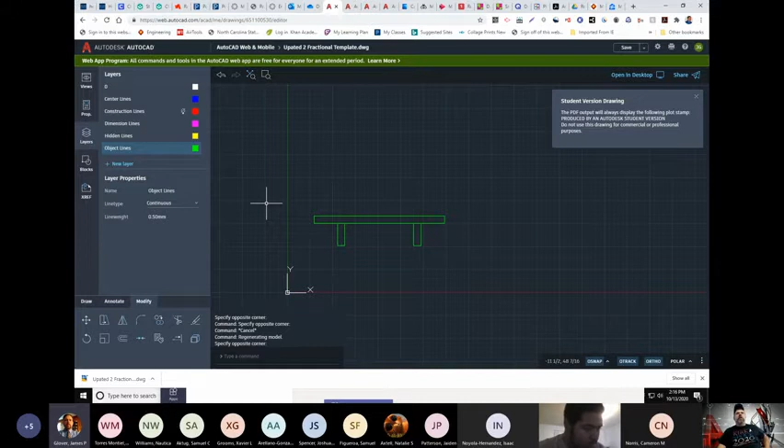I've already got my AutoCAD web app screen up because I was helping somebody at the beginning of class. But what we're going to start off with today is we're going to go to page 125, which is the day's work. Multi-view drawing 6 is this right here. So students should draw multi-view drawings of the following worksheets. These basically are the same page, just divided into 3 sections to make it easier for you guys to see it. So I opened up section page 125, section B, which is here.

Now, one of the things I'm going to do for you guys is show you that this is a slanted area, this is flat, and this is slanted. Because in your illustration, this is at a 45-degree bevel. This is at a 45-degree bevel.

All right, so my figure 5-83, we're talking about 1 3/4 inches tall, rectangular side, comes over here, comes down at an angle of 45 degrees. It tells you that right there. It's 45 degrees on this side. It's 45 degrees from this corner. You end up with a triangular shape with each angle almost being 45 degrees.

All right, so we start with our bottom line on a construction layer. We go up 1 3/4 inches to the top. And then in the center here, almost in the exact center of this, we got to go up 1/2 inch, 3/4 inch. So how far is it from here to the top? Somebody tell me how far it is. It's 1/2 inch from here to here, 3/4 inch to here. How far is it from here to the top?

Simple mathematics, adding and subtracting fractions. Anybody? Anybody that can unmute yourself and tell me what the distance is from the top here to where this begins? You got a 1/2 inch to 3/4 from here to here. So what is left here? 1/2. Who is this?

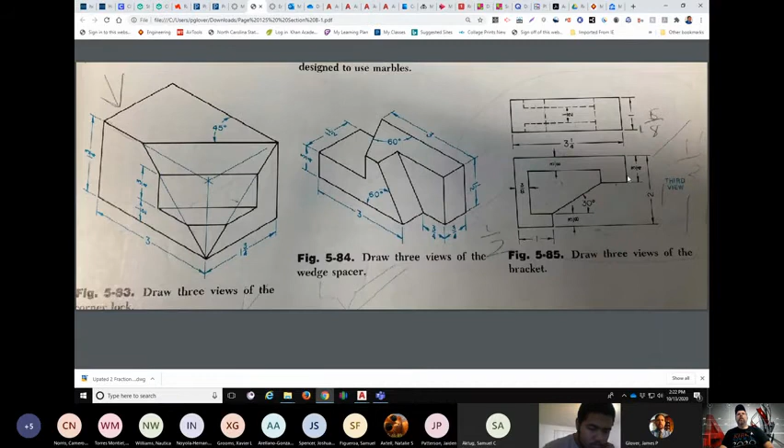All right, so you see my construction lines. All I did is I started on my construction line layer. We'll zoom in a little bit.

I then offset this line here up 3/4 of an inch because that's where that flat edge goes. Then I offset it from here to here by 1/2 inch. And then I offset it again by 1/2 inch to get my top line.

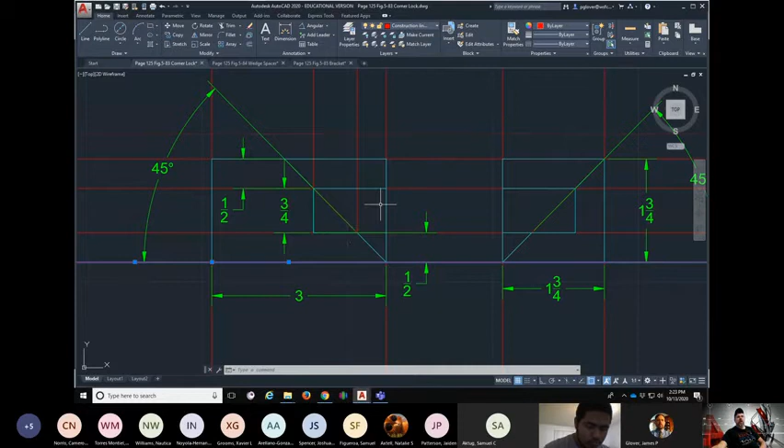It's that simple, and you create a vertical line here with your construction lines. Then you basically just have to draw your top before you can figure out where this section comes in here. So you have to do your top before you know where this point comes in right here.

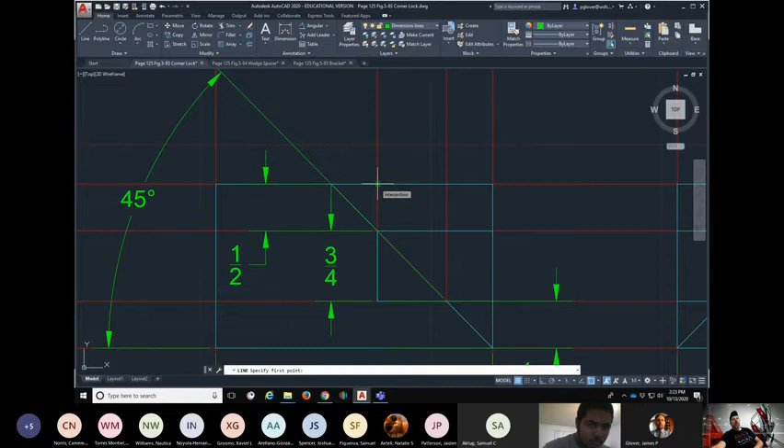This point right here is what you're talking about. It lines up right with this one right here. I can prove that to you by construction line. Right there, so those lines measure up, they line up, but you have to draw one view before you get the other views done. So you need all 3 views working together to give you everything.

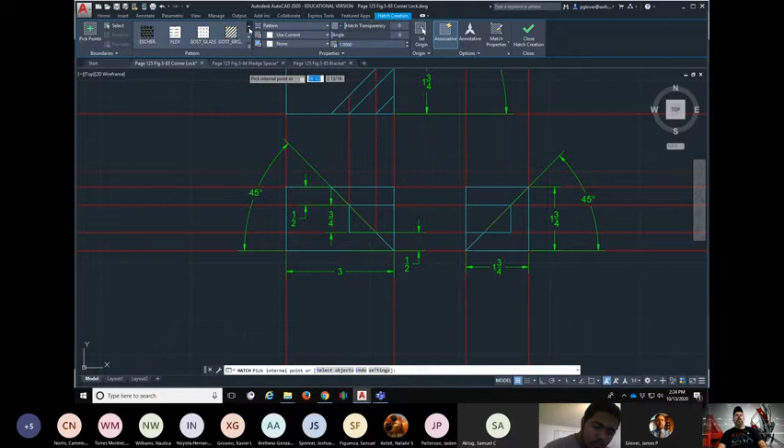And so your angle here sort of throws off your view. But what I want you to do is create a way of separating

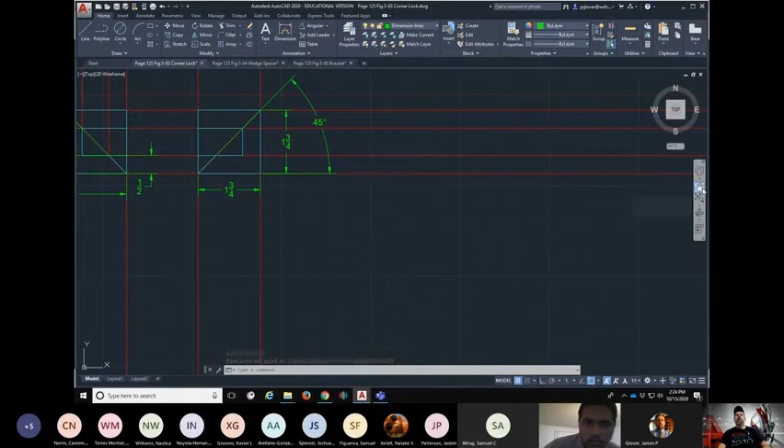the angle views from your flat views. So what we may have to do, we may have to go in, excuse me. Now, that's the pan tool in AutoCAD that you don't have in AutoCAD Web App. But you can do this even in AutoCAD Web App.

So if you type in join, and you go up here and you join this line, and this line, and this line, and hit enter, you're going to create a geometric shape.

And in that geometric shape, you're able to take that hatch pattern to differentiate that that's actually a slanted groove or slanted slide, something a little different, just to break up the lines.

All right, so I don't necessarily like that. But for you, you can go through here and choose which one you want. I'd be more likely to choose the gradient.

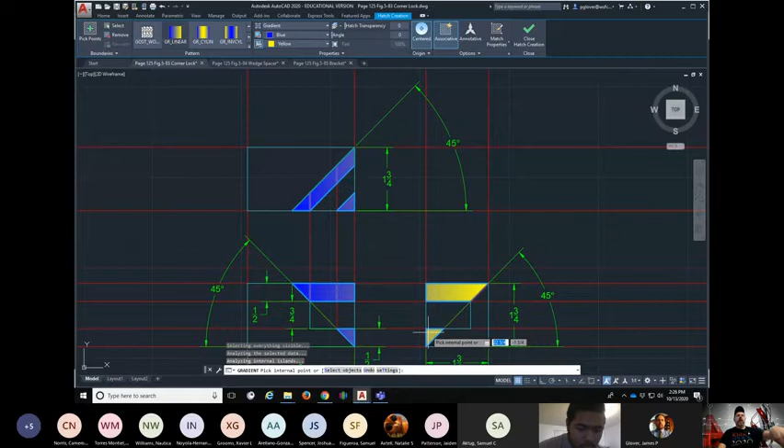And you're going to choose the areas that are going to be slanted and make them a different shade to show off that those are actual slanted areas. It does add a different view to your drawing when you're able to see those in solid shapes.

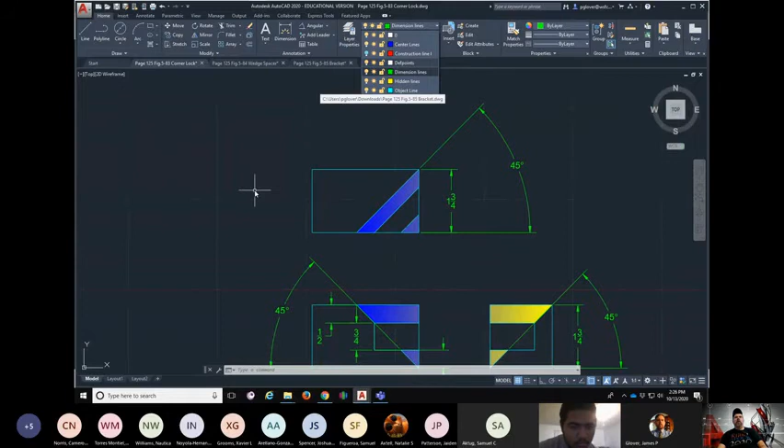That's figure 5-83. Now I'm going to go backwards because I don't need that personally. I can tell that they're slanted just by the views themselves, and so I don't really need to see that.

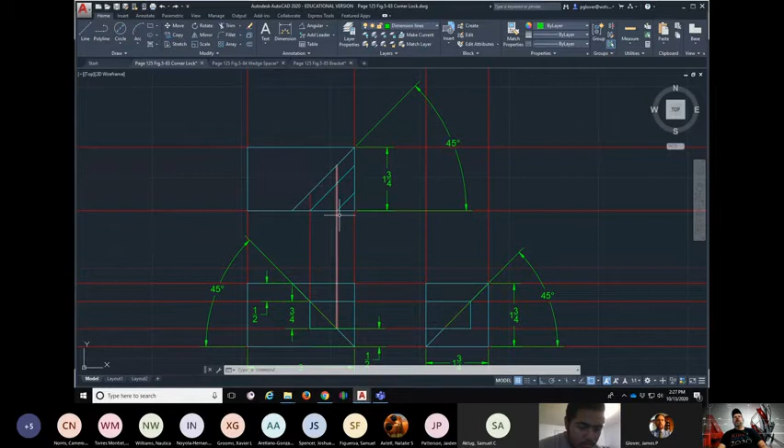But for you, I want you to set it as a shade or a gradient or as a hatch, so you can be able to prove that these are actually slanted and not just all flat. I want you to be able to prove it to yourself and to me. All right, so that's figure 5-83, 5-84.

Let's go here. One that's a little simpler. Let's go to our construction line layer.

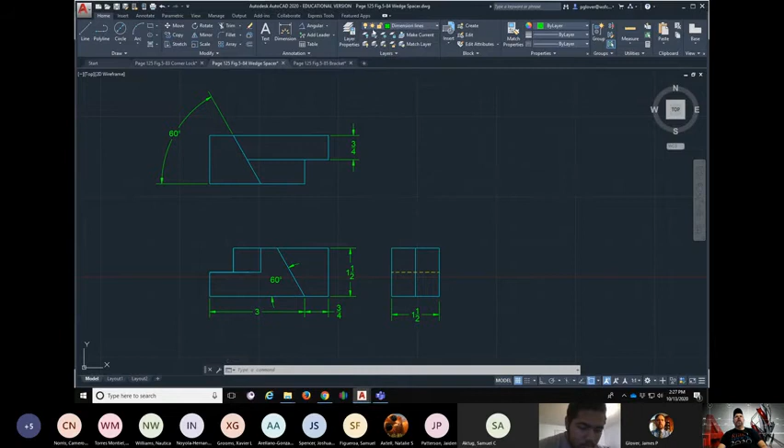Now, I can take you back to the drawing, but I can also show you here because I got everything dimensioned. All right, so I know this whole width of this side here is 1 1/2 inch. I know the whole width from here to this point is 3 inches.

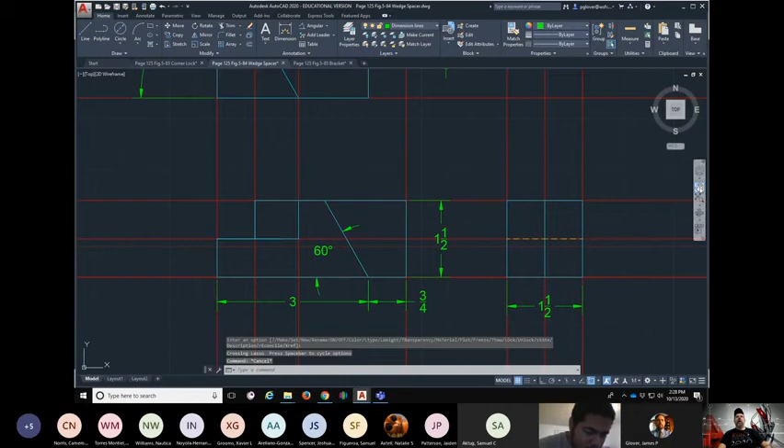And I know on the back side of this line is 3 inches from here to here, from this corner to this corner.

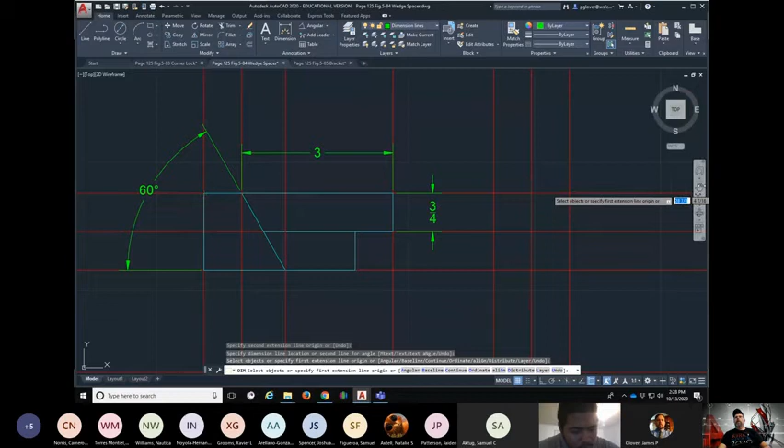All right, I know this angle here is 60 degrees. I know this height here is 3/4 inch. I know this angle is 60 degrees. Now, this is the slanted edge.

This is a straight up and down vertical edge, and part of this is a slanted edge. So what we would do, if you wanted to show that...

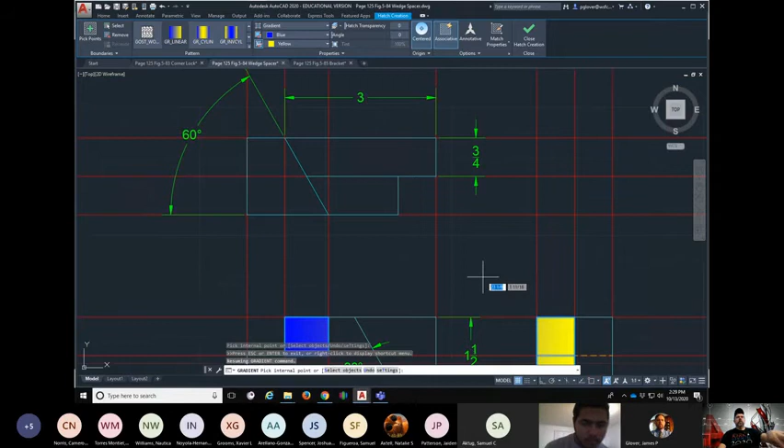And there you have your slanted edges shown by gradients.

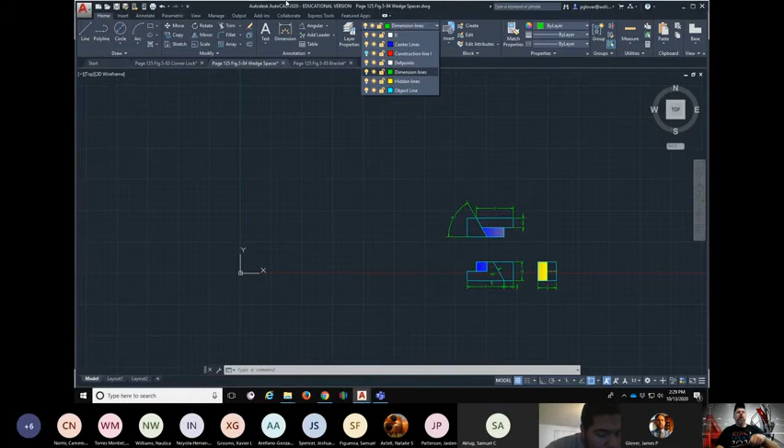Now, but those are angled edges there. That's an angled edge there, that's an angled edge there, that's angled, this is angled. So that's how you're determining your angled edges, is by showing your gradients in those edges.

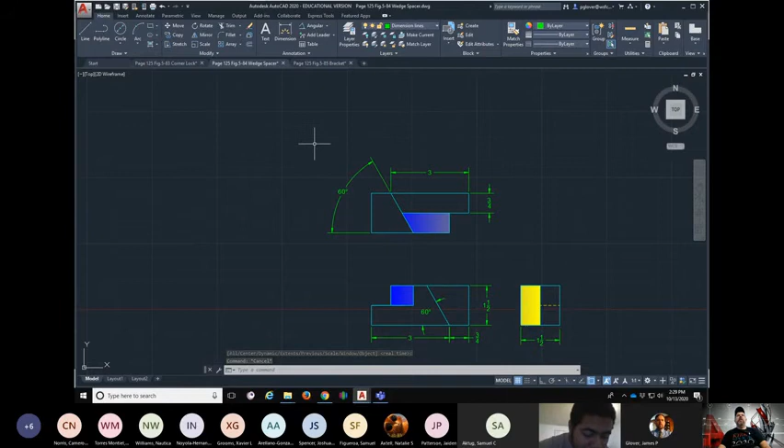I don't need to see that personally, but I want you to be able to show me and to verify that they're actually angles by doing that.

What you would do is, in order to create that as a shape, as a geometric shape, and not just lines, you have to go in and click Join, join, enter, and select your line types.

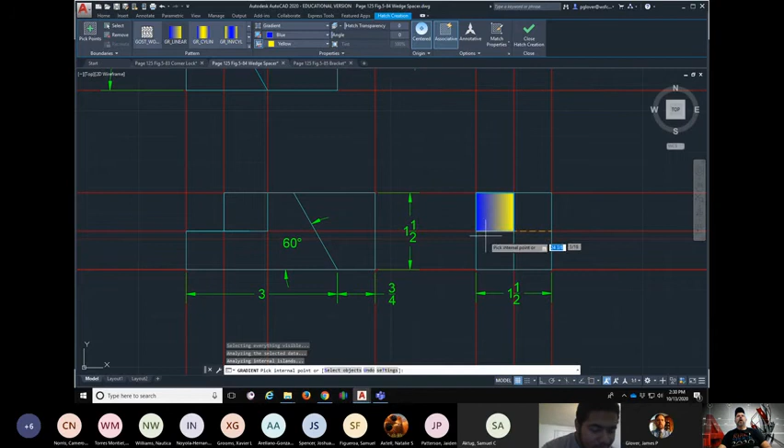And hit enter, then you would go to gradient and enter. So you get a gradient on this edge showing that this is actually a slanted edge, not a perfectly vertical shape.

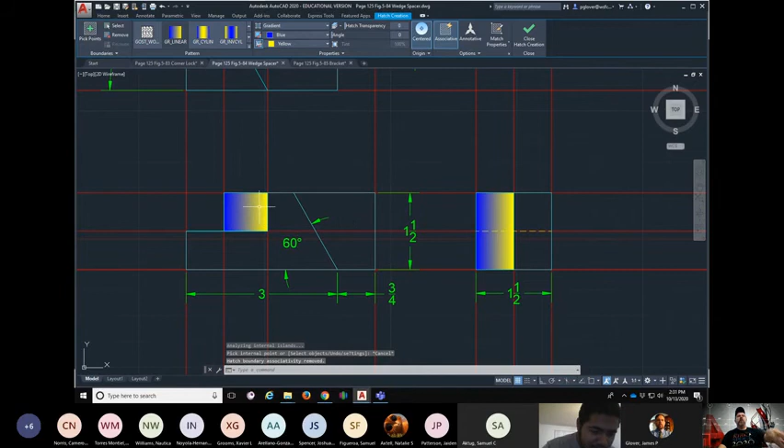And then you would do the same thing here. But see, this shape is an actual geometric edge because when I formed my lines, they met exactly at each point, so it joined them together for me because I used my snaps.

If you're not able to get your gradients here, it's because you're not exactly touching every point you need to touch. So you may have to go in and join those together to make it actually touch.

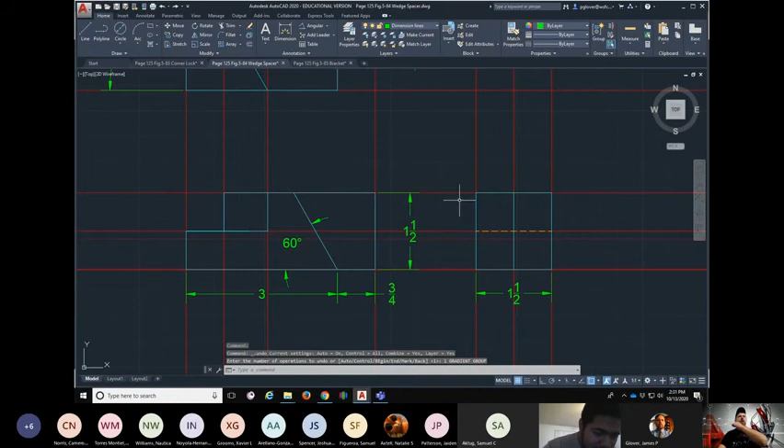All right, so we'll go back to the drawing now, the actual sheet. So I know that's 1.5 full. It's 3/4 of an inch. It's 3 this way, 3 this way, 60 degrees and 60 degrees. The same information I showed you on my drawing.

All right, now let's go to this one. This one is a solid rib inside of another member here. So we said 3/8, it's 3/8 this way. I know it's 3/8 this way. This way is 3/4 of an inch.

It doesn't tell you that until you actually draw out your shape and figure out your angle of 30 degrees. It doesn't tell you that until you get your 30-degree angle drawn from here going up.

All right, now this rib we will show by hidden lines. We're using our layers. Turn off our construction lines.

Now, can anybody tell me why, when my construction line snapped up here, why I wouldn't go back in and delete it? Can anybody tell me that? Why I won't delete that? Can anybody tell me? It wasn't because I was being lazy and didn't want to. Why was it that I didn't delete that construction line? Anybody have an idea? Anybody?

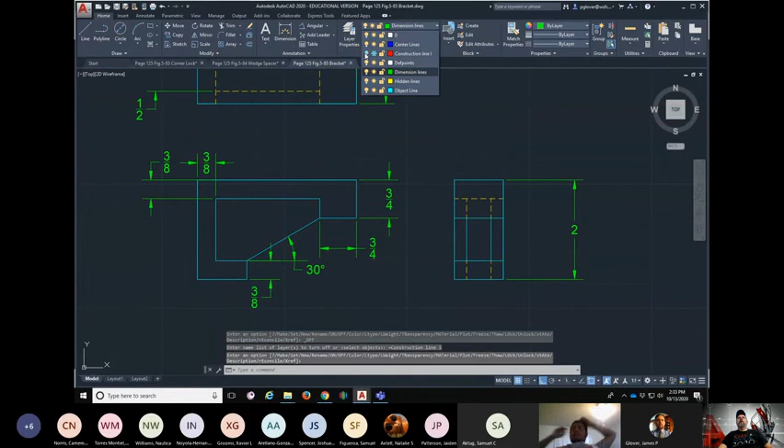Because what you could do with this layer is you could freeze this layer. And we could turn that off, and nobody would ever see that in any drawing you turned in, unless they thawed it and turned it on.

Now, we can turn it on when it's frozen, and it's still not going to show up. We'd have to unfreeze it or thaw it for it to show up. That's why I did not delete that construction line.

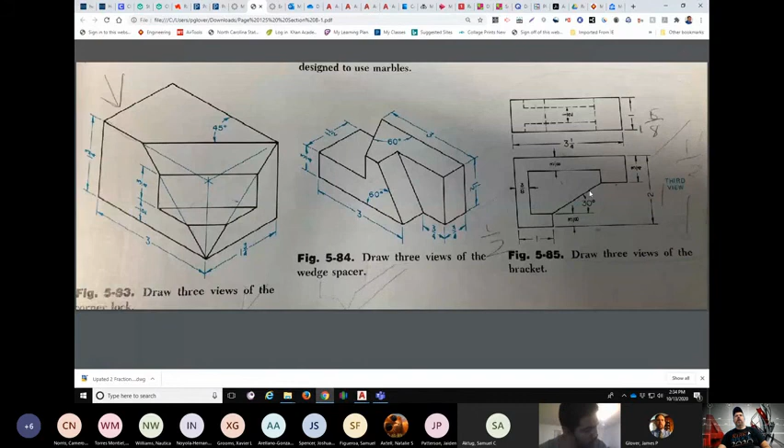In actuality, what happened with that one is I went to put this construction line in, this 30-degree angle here. I started it at this point, and I wanted to go back and make sure where that point ended up at. I came back over here, looked at it, I said it touches there. So I wasn't sure if it touched here or here.

And so I said, well, I'll just go over there and check it. And I came over here and checked it, got back to my drawing, and my construction line had just automatically connected up here in the corner.

Rather than taking the time to delete it then, I said, it's on my construction layer, nobody will see it, nobody will know what it is unless I show it to them. That's why I leave things on my construction layer that are mistakes, but they're fixed in the object line layer.

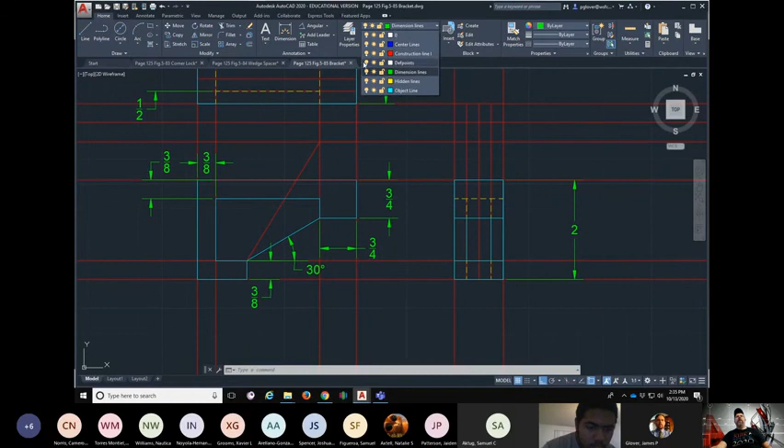All right, so you can always turn that off and freeze those, and nobody will see them unless they turn them on. And the only reason they would need to turn them on is if they'd have to verify where you got the rest of your shape information from.

All right, so this here is the hidden lines on the inside of here. There's your hidden lines on the bottom. All right, so this is basically just a divider that gets slid in here, a solid divider that gets slid in here. And basically that shape is here and here.

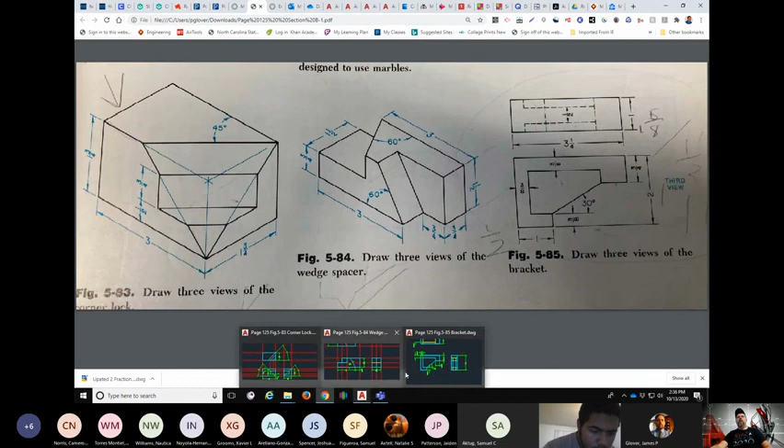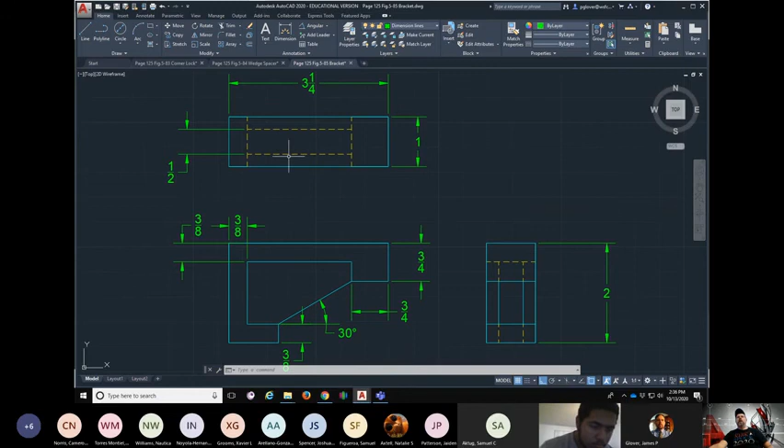All right, so you have the 3 drawings, you have the ability now to go in and do the 3 drawings. Now, we did 3 yesterday, we did 3 today, and I'll do 3 more tomorrow, and then Thursday we'll go over a fact that you will need to help you with your AutoCAD or Autodesk certification test. All right, so anybody got any questions?

Anybody got any questions?